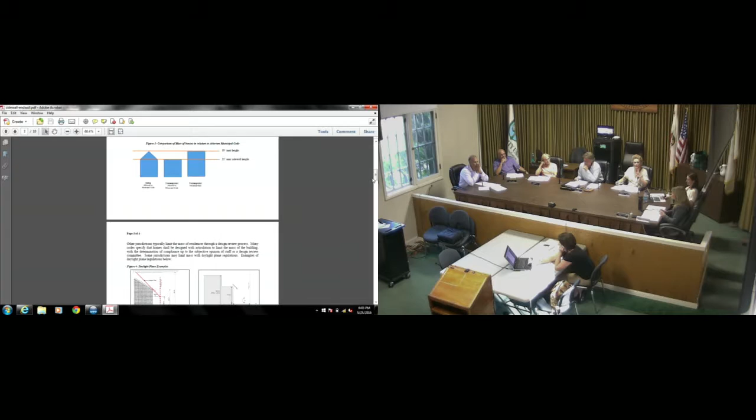Can you scroll up a little bit? So, as you know, we have sidewall limited to 22 feet in the R1A zoning district, and the end walls can go all the way up to 30 feet. I have some very simple graphics that I included in the staff report. So it works pretty well. Just scroll up a little bit more. There you go, leave it there for a minute.

It works well if you have a simple, little shed barn design where you've got that end wall and the side walls broken up by that roof eave line. It's much more difficult in the other example when you have a contemporary home because you end up with that solid wall, and they're limited to 22 feet.

A lot of times when I meet with an architect, they're like, well, we broke the plane. We went up 22, and then something else happens, and then we're going to go up again. That's really not the same wall, right? I said, well, it's in that same vertical plane. We see it, we read it as a wall, even though it may not be continuous.

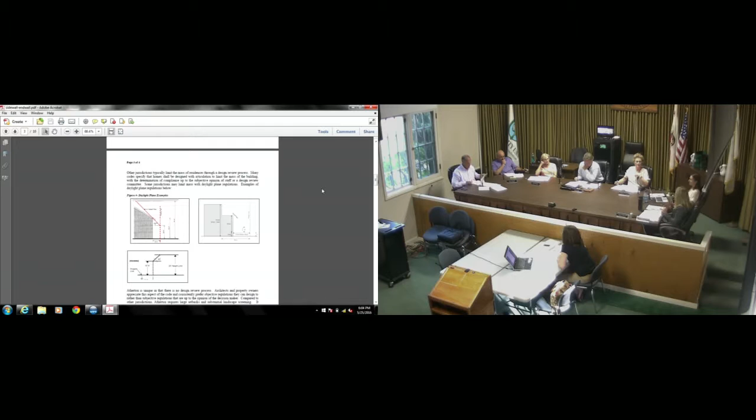So that's how we interpret the code. If you can go down to the next one. Just to give you an example of what some other jurisdictions do, a lot of times there's design review. In that process, the code may say, break up the elevation with different articulations and different bays, and it's got design elements in there that the staff member or the design review body look at and make an interpretation of, right?

So we don't have that design review process here. I'm not recommending we consider a design review process at this time, but that's how most jurisdictions handle it. I think we're very unique in that, and a lot of people in the community really appreciate that unique aspect.

Another item you could consider is kind of a daylight plane, as they call it. So that's where, every city's different, you go up 22 feet, and then you've got this 45-degree angle where there can't be anything in there. It gives them a little bit of working room. I have examples that I grabbed from some other jurisdictions of what that might look like. So that's something we could consider.

I'd really love to hear some of the architects' comments on what they think might work for them, because every situation is unique. In the staff report, one architect gave examples showing how the massing really is broken up. One of the situations that's unique and wonderful in Atherton is we work with some very highly qualified architects, so we see some beautiful designs, and that's not true in all communities. Sometimes there are other issues where it's not such high quality. So that's where I'm a little more comfortable having objective criteria, because of the significant investment people are making here. I'd be happy to hear any questions.

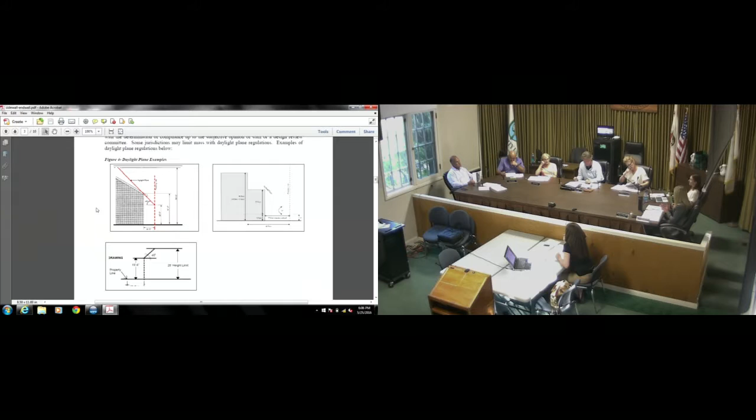Can you go to the last item on your slide just to see it in color? The graphic that was submitted, yeah, the one at the very bottom, the building in a building look. I think that's what it was intended to be.

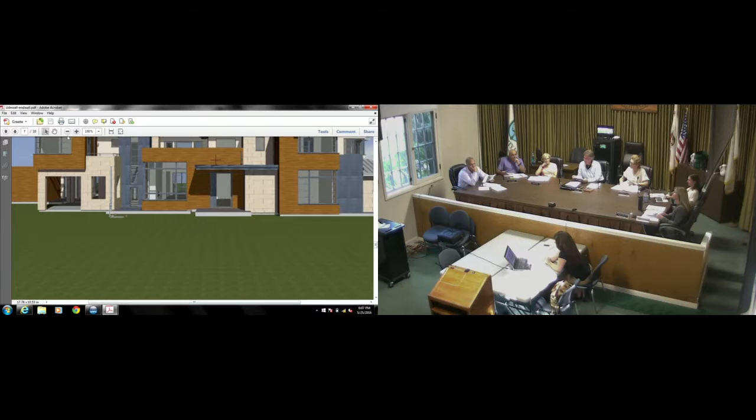I took that to be an example of what the structure of the building would be if you were doing a French provincial as opposed to modern. One more, two more, very bottom, yeah. Then that would be a normal design we might see, and this one is the contained version of a modern inside that French provincial kind of effect, right?

Right, I just want to make sure that was what I was interpreting. Is the architect here who provided that graphic? Yes. Okay, so they can answer questions for you on that specifically. Okay, great, I got one.

How does the square footage compare between the two designs? Because we have some restrictions based on that. No matter what you establish for sidewall, end wall, height, bulk, whatever, we still have that maximum floor area limit, which I'm not suggesting we change. The code does have some requirements for double height vertical space, so if it's over 16 feet, we count it twice in floor area, measuring from exterior wall to exterior wall on that plane. So if you have a large empty space, like a decorative staircase, it would still count twice in the floor area.

So my thought was that those restrictions prevent this bulk shape from really being implemented. Yeah, and there's also a limitation on the square footage of the second floor, a percent of the floor area. So we do have that, I agree with you.

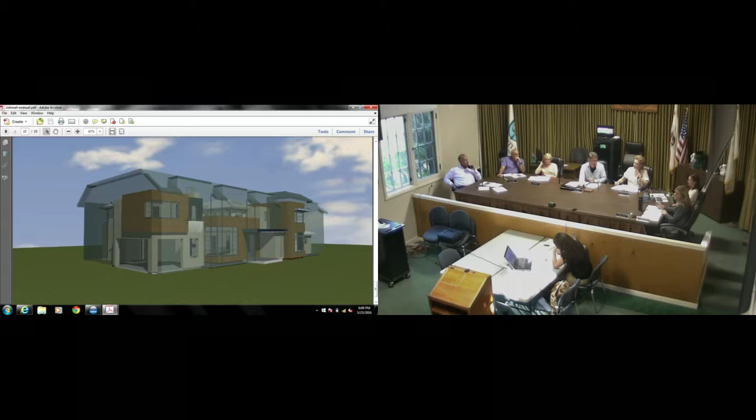All right, so then I'll go ahead and open up the public hearing and we can hear from some more experts.

Hi everybody, I am Jacqueline Greenmeyer, as you see in your letter, from Colsat and Associates Architecture. I'm a little bit new to your town, but we do work in a lot of neighborhoods nearby, Los Altos Hills, City of Los Altos, and farther south in Los Gatos. Some of the examples you provided for other jurisdictions' rules are very common, I see that everywhere, that's very standard. I pretty much put everything in the letter that we felt was some of the more difficult issues to deal with regarding the rules, and wanted to see if you had any more questions about this.

This example here was not accounting for the square footage, but it was also accounting for the fact that they could create a facade, a front elevation that looked like that, and then reduce the second floor on the backside. So it's not necessarily something to do with max square footages, but it does illuminate what is possible on the front elevation, and that's what everybody sees from the street.

Obviously nobody wants to build something that brutal, but I was just trying to illustrate what's possible and how we feel that what we proposed with our latest design was something that we felt was close to what your rules should be able to provide for.

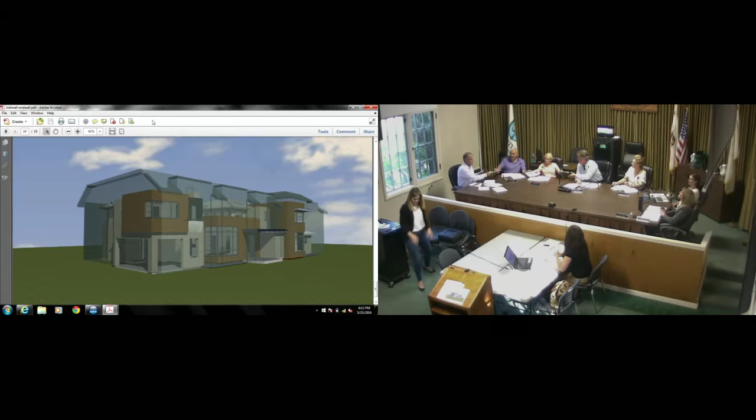I don't really think or feel that it helped. The end result, I don't think the end result is any better, more attractive. I don't think the end result is less massive.

This is the top one, right? So everybody else can follow. It's the same design, but we've made some modifications. I've kind of pointed out the modifications, just up of like 3 or 4. Right, yeah, that one there.

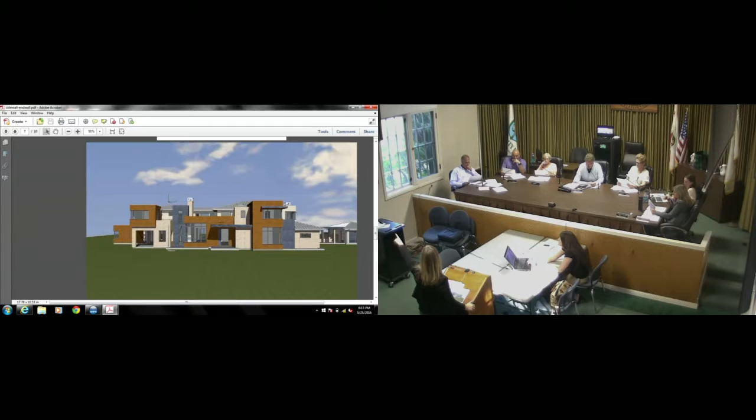So what we wanted to do was be a little more pure with our rectangular and geometric forms, and then still incorporate some of our sloped roofs. We had to add an eave to our upper left-hand corner bedroom. We had to add an eave to our secondary dwelling unit because it's over the secondary dwelling height limit for our wall plane.

And we had to lower - thought it was interesting, this is one of the examples right here that Lisa had brought up about. We assumed when we read the rules, 22 feet up is where the wall plane would be - this element here is about 10, 11 feet tall, and then this goes back 8 feet. Nowhere in the code is there any exception that because we've gone back far enough, we can start to go up taller again - something that clearly does not seem as massive anymore.

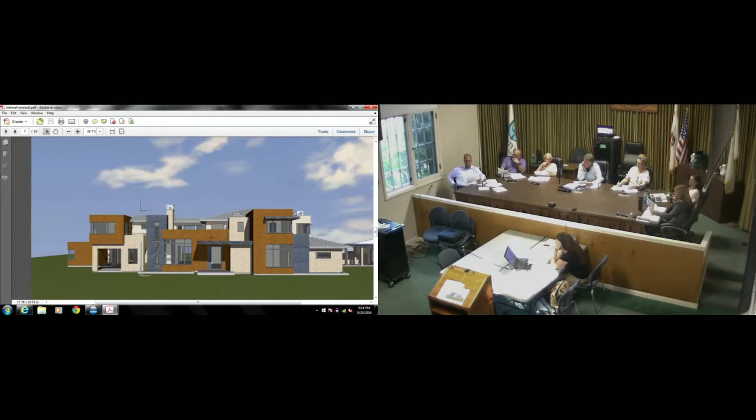But one of the things we had to do was lower this element because from this elevation you could see it. That's a flat elevation, but anybody standing here would never be able to see that. So it just seemed very counterintuitive for us when we were trying to make these design changes, and we wanted to follow logic. We want to do things that make sense. We want to meet your rules and your standards. But some of the things that we had to do didn't make a lot of logical sense for us. So that was the difficult part of trying to get through the design process.

And how tall was the peak on these, basically the metal part of this? This awning? No, here, the top one. This top is a 10-foot door, so this is 11. The top one, the very top of the diagonal one?

Right here? Up this spot, right on the very top, this one right here? Above that? The roof line? It goes all the way back, that's the one place it hits 30 feet.

Is that the same elevation for that peaked roof on the left as well? In front of the tree? No, that's much lower, it's just closer to us. That roof goes farther back, but that's quite a bit lower.

Did you also explain why you added the roof on here? Right here, yeah, so we added a roof, we were told 22 feet. So we have 11-foot ceilings on the first floor, and we have 10-foot ceilings on the second floor.

We have 12 inches of framing, which is pretty minimal, in between the two floors. And then we had 12-inch framing for the roof, and all of that added up is over 22 feet. That's just the raw numbers.

So what we had to do was bring this down to a 9-foot 4 ceiling, and then add a hefty eave, at least 1 foot deep, and we actually had to bring down a soffit to get down to that 22-foot line, or else the ceiling in here would be more like 8.5 to 9, which we didn't feel was acceptable to a house like this.

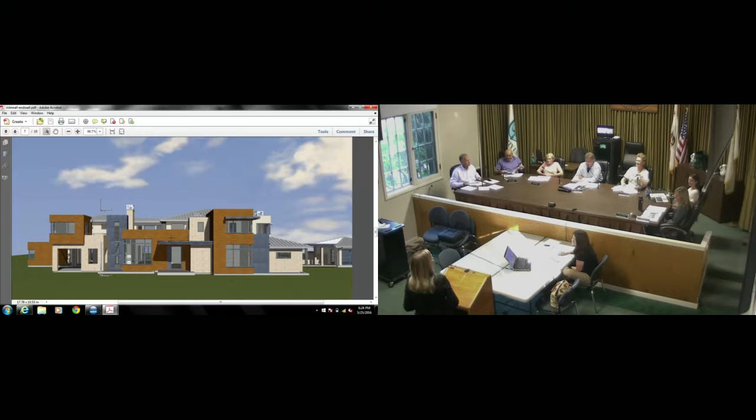Hi, my name is Mia Maraki. I am a principal at Swatt Miers Architects. I've been before you before, that's my presentation from last year. So Lisa had asked Bob Swatt to come in, but I'm here on his behalf.

We really enjoy working in Atherton. We have many beautiful, completed, awarded projects around the world here, and one currently under construction. But we have come across this end wall, sidewall condition on multiple occasions. We only do modern architecture, so this is the only work you'll probably see from us here. The problem we usually come across is, as the one before said, when our walls are in the same plane as our roof, we're penalized because our roof becomes counted as wall height.

Can you scroll down? Sorry, I didn't expect to give this presentation again. If you go a couple more slides down. Yeah, both times you gave it. Yes, probably one more.

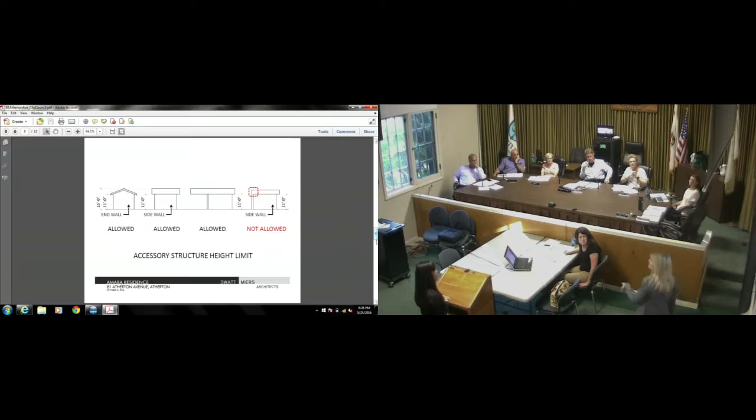I don't know, do you have the house design at all? I don't remember what's in here. It's looking great, you can go pass it on Atherton Avenue.

I did that the other day. Well, it hit us at the accessory structures. Basically we had the roof turned down to a wall, and that was the condition.

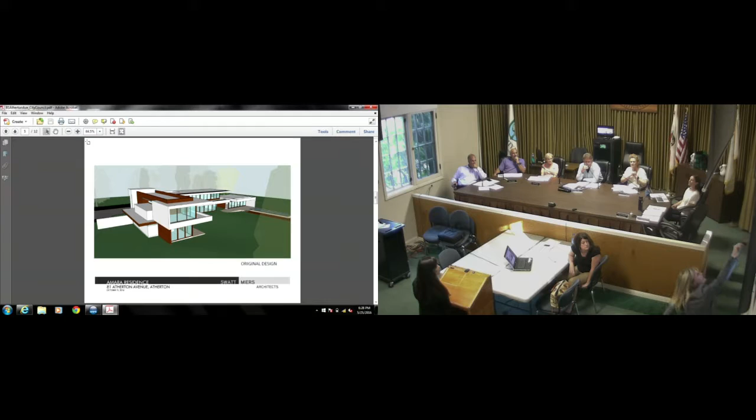There's one probably towards the top. Maybe that one, number 5. Yeah, let's look at that one. So they're also like those parapets that are kind of screening mechanical equipment, way in there, that still is a sidewall. But when you come out and have this big eave overhang there, that's a roof.

But that doesn't make the roof better, it becomes architecture. It becomes a sidewall as soon as you connect it. So even though this is the wall and that's the roof plane, and clearly the roof plane on this side, all of a sudden then we were against the height constraint. So, you know, if you were to define it as top plate of wall, and then the roof can be the roof, that would also be, instead of these perpendicular axes and declaring one as one height versus the other height, instead of walls versus roofs.

So based on that example, 2, 3, and 4, right? How often is it 4, where you have the wall and the roof appearing to have the exact same point? Is that an architecture? But you know what, it was in the image she showed as well. It was the same thing, 100%. Those wood elements had the same, it was a wall that came up and became the roof.

So it's something in modern architecture. Yes, we also love the overhangs, but sometimes we just want to quiet it, and it's one volume. So that's where this sidewall condition really... Well, that's what I heard earlier, I thought I heard sometimes, not always. Not always, right. But if you have, unlike this, if we're talking about a square volume, it's going to be the same height all the way around. And as soon as you want to pull in that roof overhang, it becomes taller than what is allowed.

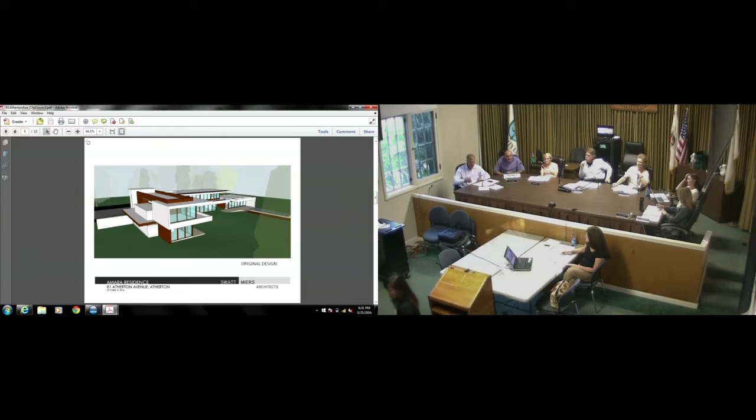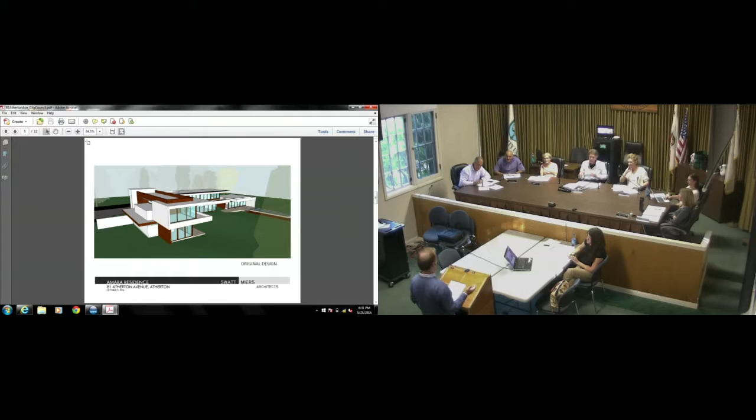I'm going to defer to the experts, which are very good. But all I wanted to say tonight, first of all, I really appreciate Lisa connecting with the architectural community. I actually reached out to Bob Swatt, Steve Simpson, and Tim Chappelle at Arcanum Architecture. These are all highly qualified, superior architects, and when I had the conversation with them, the comments were all the same, that all of us are struggling with this issue. My practice, I've been practicing in town for almost 30 years now, and I've seen the code evolve a little bit. But now, as my architectural style is leaning more towards contemporary and modern, I'm coming up against many of the same issues that they are in their daily practice.

I think this eats up a lot of staff time. I know Lisa and Holly and everybody down there over the years have answered the same questions over and over again. And now that my practice is evolving into a little more contemporary designs, we're running into some of the same issues. So I don't have any examples and I don't have any solutions, but I just want to let you know that I think we're willing to sit down and try to brainstorm and come up with some ideas that are receptive to you as a commission and gives us some flexibilities, because I think qualified architects will appreciate the rules that give them some opportunities.

I think what everybody's hesitant about is people who come along and find a way to work around the rules and create these things. There's a few examples I can cite over the years, specifically the mansard roof issue that created a floor area controversy as well as a bulk and mass issue.

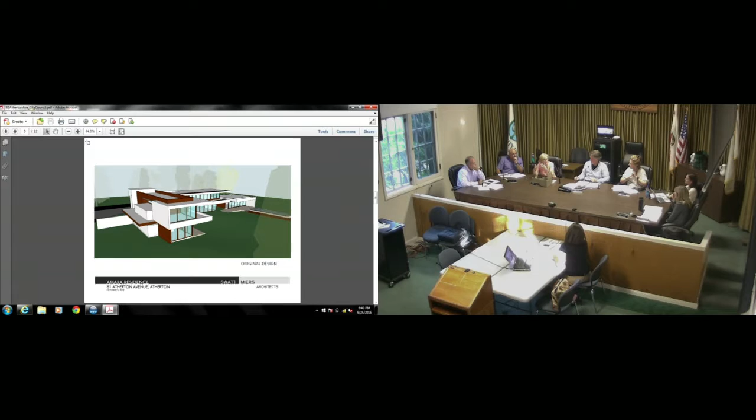But it also depends upon the width. So where this wall could be and what its height would be has to have some boundaries, and I would assume that with some thought we could put some parameters in place that would make the position of this wall something that we could all live with, something that was higher than 22.

And at the same time, giving another elevation or a little more height to another part of it. But you can clearly say, looking at this, if this is the end wall, these side walls with a flat roof, it doesn't match up. Yeah, that just becomes a big box.

Yeah, so I kind of would like to see something along the lines of making some sort of triangular shape, and that the sidewalls, if we need some kind of diagonal or some kind of angle, the sidewall could be as high as where it intersects.

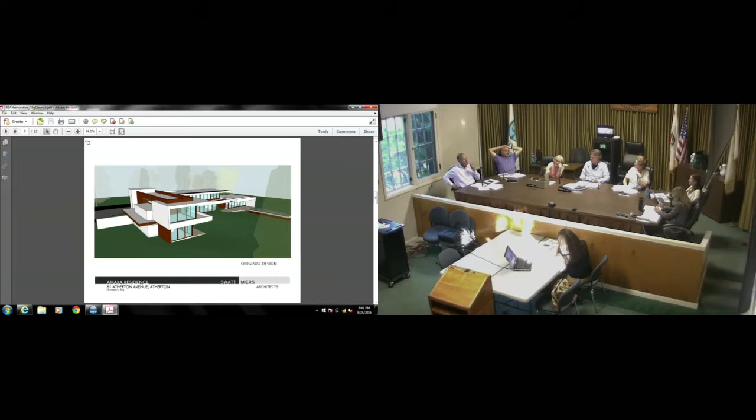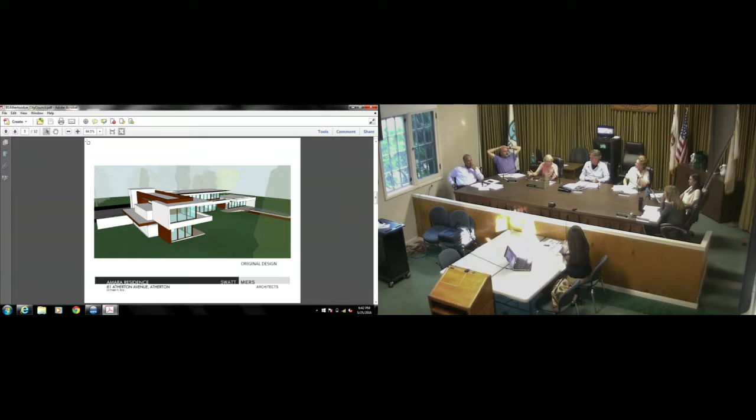So if it comes down like this, the sidewall could be, I don't know. You're talking about like similar to the 45-degree? Similar to it, but I think we need to have some parameters on it as to where this can be with regard to the shape of the building, because we've got big lots and you could make a really long building.

Or even have the front wall be 8 feet or 10 feet high, and the back be 34 feet high, so that you end up with the ability to have a sidewall that's pretty big.

Well, that goes back to the purpose statement comment. There's an element of this that's for the neighbor, the privacy, the visual lights and all that other stuff, and then the other part is the architectural significance we're putting into the community, and that's where the rule builds that in, because we can't do it as a body, which we don't want.

I agree with you, don't go down that path, because then you get this. I've been on two of those boards, and they get much more political than this one, let me tell you.

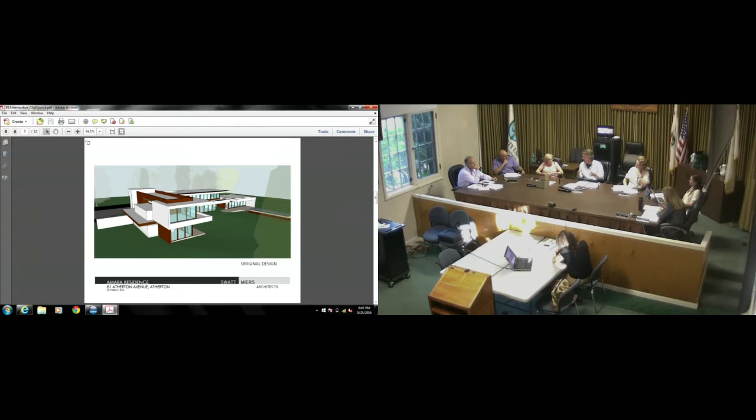So yeah, there's a lot to think about. One other idea rather than some kind of code change now, is to give a purpose statement for what we're trying to accomplish and set up guidelines for the planners, such that they could say we've been given these guidelines for exceptions to be considered by the board, if you want to understand what they're thinking about. That's one way to experiment with it. We could come up with an interpretation of what might be a code and play with that for a while, then bring it forward, and we still get the ability to review it, but they have a cleaner shot at saying we think the board is behind this kind of experiment if you're interested, otherwise you're on your own.

Something along those lines. Which board are you referring to? Us. Oh, okay.

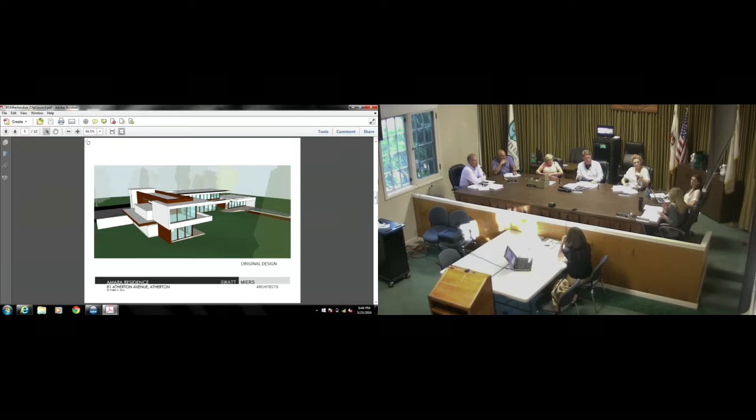I'd just be concerned about the legal authority for you to make that kind of a decision and bring it forward. But the area you might want to look at doing that with is the current language, and I need to read it again, of the special structure permit - rather than have the entire house meet the setbacks, have it be to the offending element, and that's something you do review. So I think that's an area where, if you wanted an interim step, might be a good place to look.

So given that this was to be a roundtable, I think it'd be helpful if we didn't close the public comment, because unless all of you are comfortable with architecture - I mean, I don't know, I get what Mary's saying, but I don't. From an architect standpoint, I'd love to hear their input. Since this is a roundtable and you closed it, we might want to open it again so they can do their part. I can open it.

Mine is just give and take on it, because I think there's a potential likelihood somebody would do that. I just don't know from a design standpoint. Let's focus on the ones that are most likely. The outliers I think are great, because let's make sure those don't happen. I just don't know enough about architecture to be any help here. Yeah, well my brother Frank Lloyd Wright.

No, let's go ahead, do you have any comments on that? I have a question before we start that. Yeah, go ahead. Lisa, are there rules on window placements? Isn't there a rule about how high the windows can be?

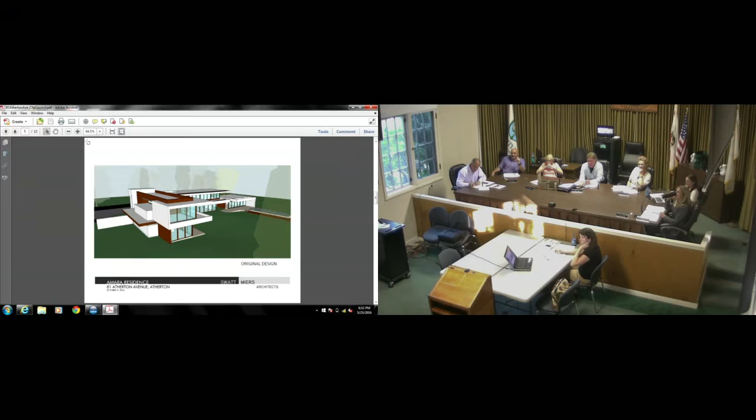Come on up, let's get you on the mic. That's all I wanted to say. Max flexibility is always the best because there's a lot of creativity. And if we say, you know, even if we could say 24 feet, we're still going to end up with a lot of things that start looking alike. So I don't want to limit your thinking to creating a form. I think we need to give you ideas that give us flexibility so we don't end up with a lot of contemporary homes that start looking alike, if that makes sense.

Yeah, I think a challenge for this whole format, and the trade-off of not having design review, is that the rule does create a structural thing, right? And without a design review, you're going to get less freedom. Design review gives you freedom, and it also opens up Pandora's box. Rules give you more structure, and you got to be creative within them, but it's definitely going to be more structured. So that's the trade-off all the time. I think of the two, we've chosen the latter, so just be aware we'll have a tendency to be more along that line.

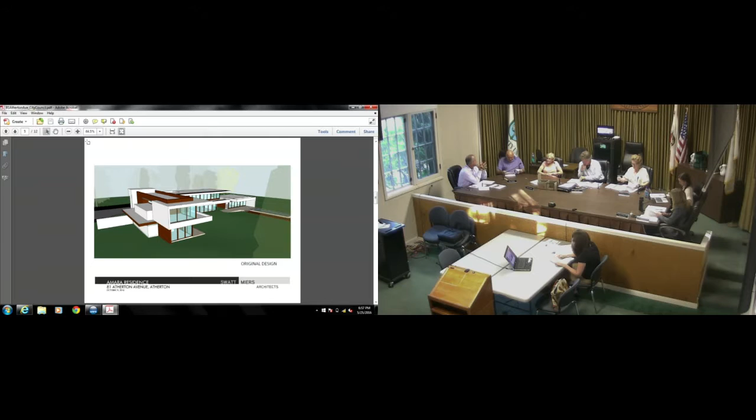Well, they could always spend more if they wanted to, but that's the council's proposed budget. And some may be signs, or I don't know what they might put in, because I don't think you get a roundabout for that. Being the new items, that's just a starting point, and then we get to the first year of the plan, they kind of underestimated, or it hasn't been there before, so they had to start somewhere.

And I think the traffic calming program came out of the Traffic and Transportation Commission or Circulation Commission. You're on that as well? Transportation Committee, yeah. So you may know more. Well, it really came out of Public Works.

There is a plan or process they're trying to put in place where neighborhoods could get together and present a case for having some sort of traffic management device, whether it be one of those signs that says speed limit 25, your speed 45, or a speed hump or something like that. Just because there's a plan that says you can request these things doesn't necessarily mean you would get one of those. And for $25,000, I don't think anything is going to fit the bill.

Slightly used, but the lights are burned out. Yeah, but perhaps it's a mark on the wall. Yeah, it's a starter.

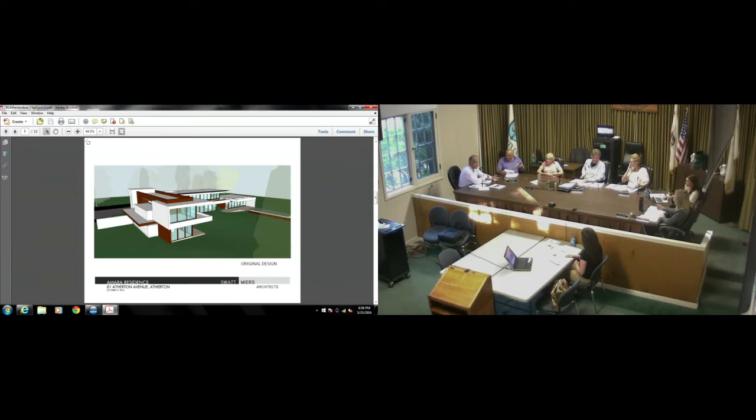Well, is the goal for us to say yes, the council's proposal for the budget amount is correct? No, it's just consistent. Go with it, run with it? Yeah. I think a sign that says 'slow down for the red-legged frog' would be very... There's no CEQA issue, looks like it's exempt, it's consistent with what was proposed. That's our test, is whether there was something out of consistency. We'd have to say, right, out of character with the town and the goals.

Happy to make a motion unless anybody has comment. I move the Planning Commission find the capital improvement program for fiscal years 2016-2017 through 2020-2021, and the projects included in that program, are consistent with the Atherton general plan for the reasons noted in the staff report. Second. Moved and seconded. All those in favor say aye. Aye. 5-0, no opposition.

All right, commissioners' report, item 5. I just wanted to let everyone know that about a couple weeks after our last meeting, I met with Bill Chang of PG&E. He reached out to me and wanted to get together for coffee and talk about PG&E's overall strategy and ideas on how to do outreach, not just to our community but throughout the Bay Area. It was very pleasant. I really appreciated him making that effort, and I think he is genuinely trying to establish open, transparent communication.

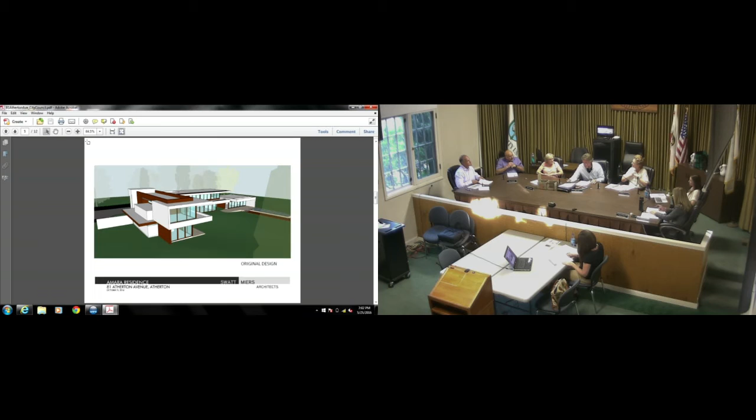Anybody else? All right, I've got one thing. Dave Sakai emailed us—he emailed you too. There was a location over on Green Oaks Drive, a vacant home that was bought by a developer. He emailed me and the city manager following up on code enforcement. It was an issue that came to me by email, and staff got on it right away. I happened to be out bicycling around and actually looked at the place—it was a vacant home with a pool that had about two feet of dirty water in the bottom, not fenced off, and some other issues he highlighted. But staff got on it right away, it got cleared up, there's a fence around it now, and it's fixed. So I just wanted to let you know he reached out and staff was already on it, but it came to me.

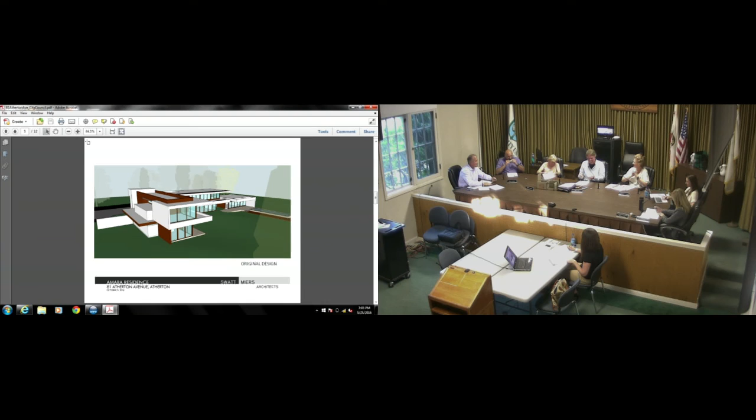Were you in a costume of some sort going around? Which superhero were you when you were on your bike? Because I heard about that—it ended up in the blotter and in an almanac. No, but I have theme music, some guy with a ghetto blaster, and he was just all over the place. I'm like, geez, I have it on my iPhone where I went. Staff report—you got me all blushing. You're scaring the camera there, you're purple. No, thank you, oh thank you, you got me off the hook.